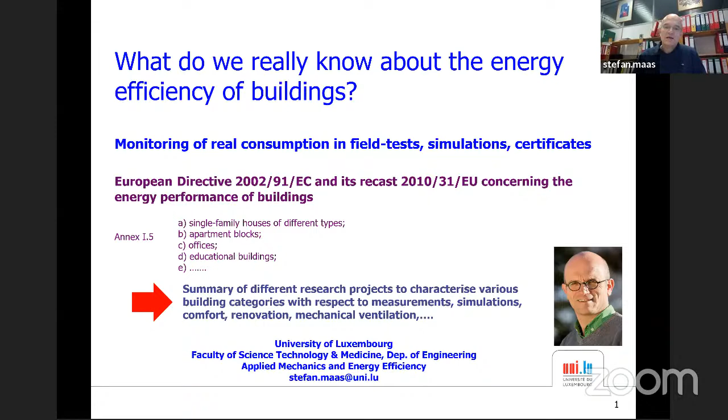As Dr. Giffen said, I'm a professor here at the University of Luxembourg. What I'm going to tell you is a summary of several PhD theses done in the past at our university. So I dare to say that we have today a reliable database to describe the situation in Luxembourg and in the greater region.

First, I'd like to start with some definitions to make sure we talk of the same thing. These directives go back to primary energy. Primary energy is non-renewable energy, for example crude oil, coal, uranium, or natural gas. Our certificates normally refer to this primary energy, which is then transformed into final energy, and the difference is you have losses during this transformation process.

So from primary to final energy you have losses. What you buy, what enters the building, is the final energy - that's what you pay. But the certificates refer to primary energy. Then we have again transformation losses inside the building, which in the end we call heating demand or net energy. That is again something different.

Now we'll look at two different characteristic cases, for instance the case of electricity. If you produce electricity, nearly two-thirds of this energy is lost as thermal energy somewhere in the production process. So for electricity, we apply in Luxembourg a factor of 2.7 to go back to the primary energy - this is the so-called primary energy factor. If we compare to fuel oil or gas, the factor is only 10%, because we typically have only 10% losses there.

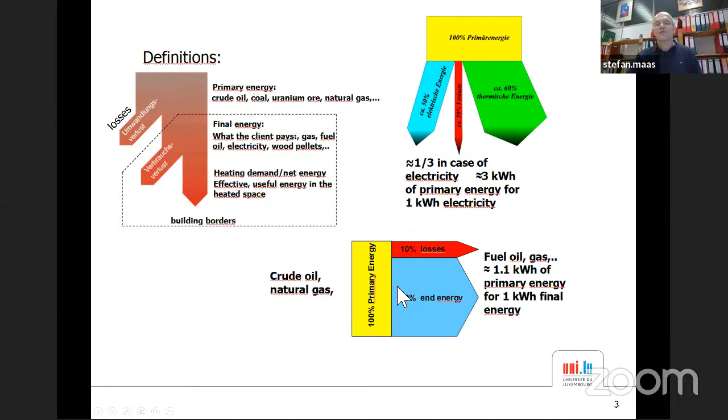Then the effect of climate - climate is different in Europe, it's not everywhere the same. If we look, for example, at the transmission losses of a wall, it is the U value, the transmittance, times the surface, times the temperature difference, times time. And this factor, temperature difference times time, is not constant over the year - it changes every day.

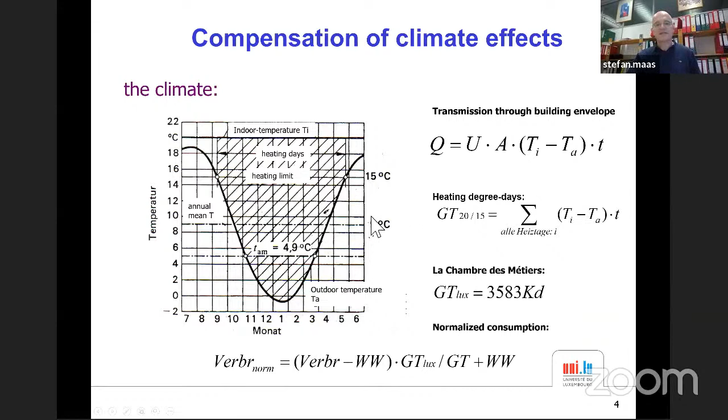The next point is the references we use. You can define many different surfaces in buildings. Here in our calculation, we referred to the so-called gross area, which is simply A times B, including all the walls, floors, staircase, everything. This surface is easy to calculate, but other European countries refer to the net area, which is different, so you have to convert. Here I refer to the gross area; if you want the net area, it's approximately 80%. Keep in mind, other norms refer to volumes. So you must pay attention to what your reference is, otherwise you compare apples with pears.

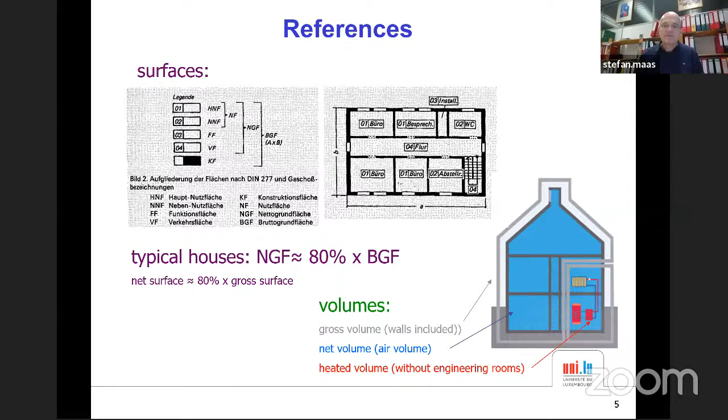Now let's look at the very first result: the final energy for heating and domestic hot water in the years 1997 to 2007. You see here a specific consumption in kilowatt hours per square meter and year, where the square meters are gross square meters. Just to give you an idea, 1 liter of fuel oil is approximately 10 kilowatt hours. This conversion is based on the lower heating value, meaning the water in the fumes is in vapor form. If the water is condensed, we call it the higher heating value. That's again an important point to pay attention to.

So what we see here is we analyzed 54 traditional houses in Luxembourg, and found a mean value of 131 kilowatt hours per square meter per year. That is 13 liters of fuel oil per square meter. And the standard deviation is 32, which is roughly one third of it.

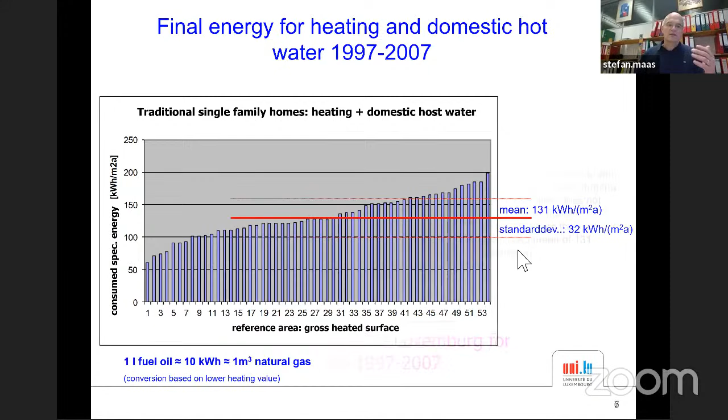Once we assume a normal distribution, we can say that with an N of 54 buildings analyzed, with a probability of 95%, the mean value does not deviate more than 10 from the calculated mean of 131. So our sample is representative for Luxembourg for these years, 1997 to 2007. That is the final conclusion.

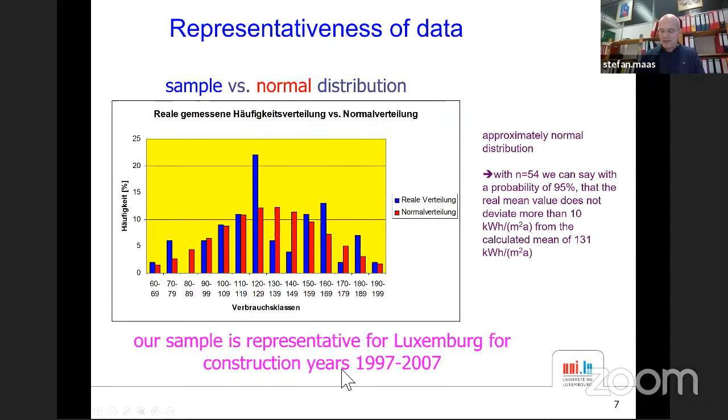Now, as Luxembourg is a very small country, we compare to other countries around us, other European countries. You have to find studies where you clearly have an indication of the climate, the heating degree days, so you have a clear reference. Here we used gross surface, others use net, but we can convert. Also we have to pay attention that we have a comparable year of construction. Here in Luxembourg, we used 1997 to 2007 in this study. And we found some of these studies.

We found data from Germany, Switzerland, and Austria. When we compare to the German data, Luxembourg is consuming 30% more, or Germany is one third better. The same in Switzerland. Austria is nearly the same as Luxembourg. So compared to Germany and Switzerland, Luxembourg has a deficit because our houses consume more.

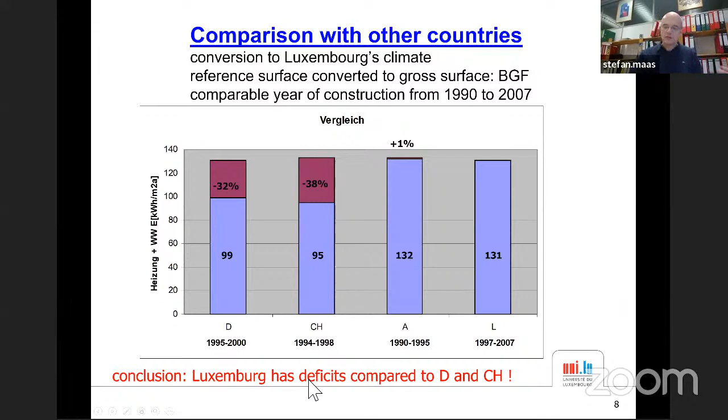But then we split the categories more in detail. We did not only analyze traditional homes, we also had row houses, prefabricated houses, and so-called low energy houses. Looking at the average value in these different categories, we see that for low energy houses we only have 73 kilowatt hours per square meter per year, which is 45% less than for traditional homes. So also in Luxembourg, we were able to build houses that consumed less energy in this period.

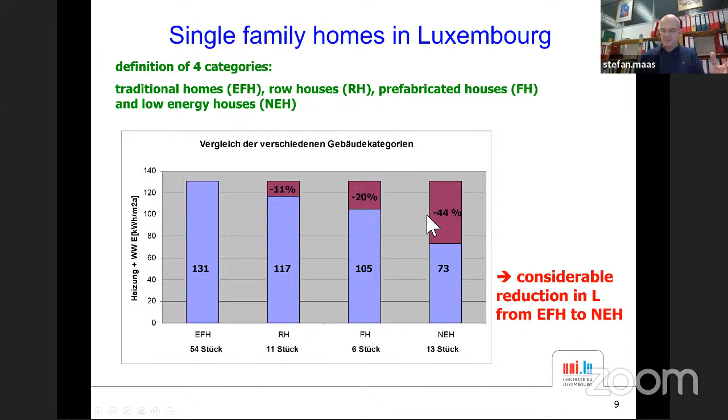Now let's look at what this low energy concept meant for these years, 1997 to 2007. Please pay attention, these definitions are permanently updated.

So a passive house of 2000 is no longer a passive house in 2020, and a low energy house today is not a low energy house at this time. At this time, it was a heating demand of 60 kilowatt hours per square meter, including a blower door test and a thermography test. That was a definition in Luxembourg in this time period.

And now if we take this 60 and multiply it by the transmission losses inside a house, which are typically 25%, plus add the domestic hot water, we end up with 100 kilowatt hours per square meter. This is for net surface, and if we convert to gross surface, we would have expected to find 80 kilowatt hours per square meter. So 80 would mean low energy concept according to definition, and we found 73.

The conclusion is Luxembourg's low energy concept worked well. We found in our field test what was expected.

And then we took data from the statistical office, called STATEC in Luxembourg. There we found that approximately 1,000 buildings are built here every year. But in this time, only 2% went for this low energy concept, and only 0.5% went for the so-called passive concept. That means the conclusion is, yes, the houses meet the requirements, but most of the people simply fulfill the requirements. They don't go for low energy or passive concept. They simply stick to the norm.

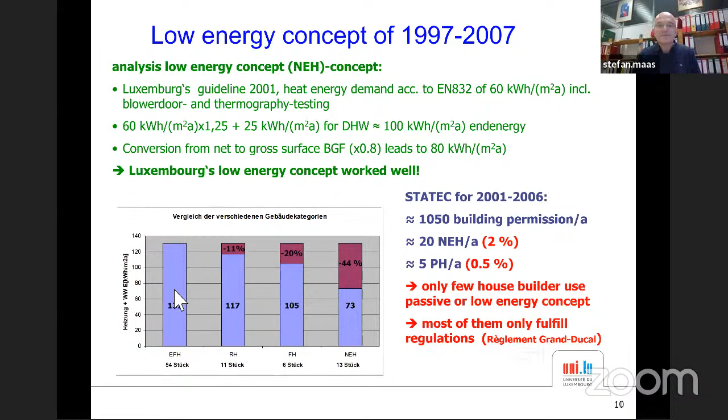Now we look at the electrical consumption of a family home, single family home. First of all, we look at the absolute values, so what every household is consuming.

In Luxembourg, we found an average of 6,000. Here you see the standard deviation. For the prefabricated homes, we found 5,400. For the row houses, 4,900. For the low energy houses, 4,800. So that means also in Luxembourg, we have considerable differences, and this low energy concept works quite well.

In Germany, we find 4,100, and 5,400 in Denmark. You see, Luxembourg is above Germany once again. And here are the so-called passive houses, which consume by far more - 14,000 kilowatt hours per year. That's interesting. Why do these passive houses consume so much electricity?

Now you see the electric consumption per square meter, referring once again to the gross surface. Then the picture is a bit moderated. We see the traditional homes with 24, the prefabricated 29, the row houses 28, but again, the low energy was 19. So the low energy is better than the normal one, and the passive is again above.

But now in Luxembourg, we are better than Germany. If we compare to the previous slide, here 6,000 versus 4,100. But if we look to the specific consumption, we have less. Why? Because the houses in Luxembourg are typically larger than the houses of our neighbors. So you have one stove, one fridge, and the larger the building is, the better the specific electric consumption. Once again, we have to be very careful what we compare to each other.

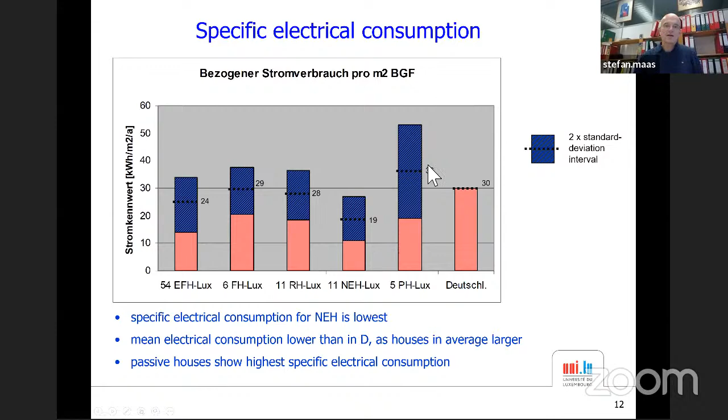But still, the passive houses consume quite a lot of electricity, more than the traditional homes. And here comes the explanation.

So if we go back to this primary energy, what we defined at the beginning, we have to multiply for gas and fuel oil with 1.1, and electricity in Luxembourg by 2.7. These factors are average factors for the transmission losses. They are defined by national governments, and it is not the same all over Europe. Therefore, you have to pay attention which factors are used.

Here you see the blue part, that is the heat part, and the red part is the electric part. If we look now to the normal houses - traditional, prefabricated, and series - we are around 200 kilowatt hours per square meter per year. The low energy houses are considerably lower, one third lower. The low energy is here, and the passive is 50%. So the conclusion is, yes, also in Luxembourg, we were able to build houses with only 50% of the normal consumption if we apply this passive house concept.

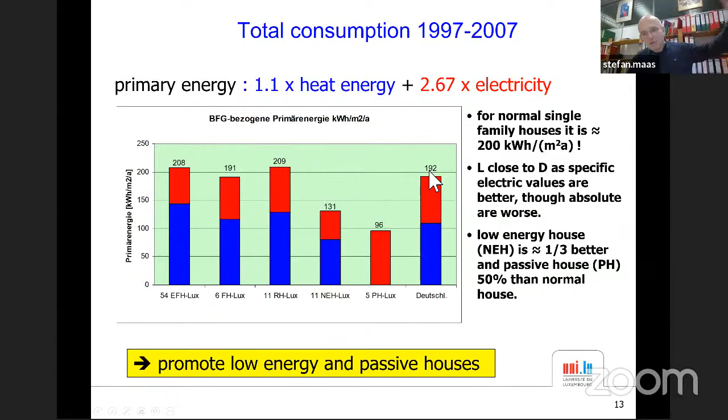But in this case, we use only electricity because you can substitute heat by electricity. That's the reason why the European norms refer to this primary energy. So the conclusion was, yes, please let's promote low energy and passive house concept because we have a clear reduction. Compared to Germany, for example, we are not far away - we have more or less the same specific values. So the absolute values are higher because our houses are bigger.

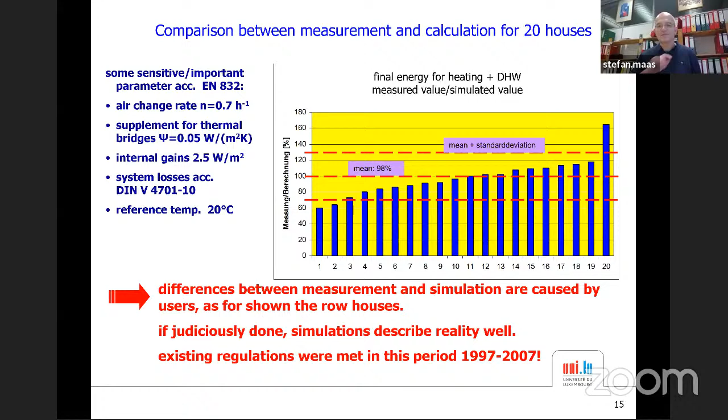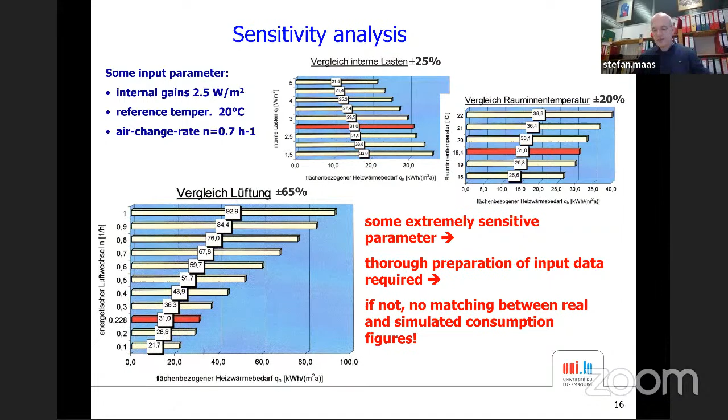So what I want to say is these calculations are extremely sensitive. There are some parameters which have a large impact on the result, so you really have to carefully prepare the input data and check that they really match with what the user does. Otherwise you will see differences between calculation and measurement.

So let's go back again here - that was the single family homes. I want to recall, on average we have 130 kilowatt hours per square meter in Luxembourg, and the standard deviation is 1/3.

Now we'll come to the next building category, which is schools and offices. We analyzed schools and offices which were built between 1995 and 2010, so let's say new schools and offices. I dare to say, compared to what was built in total, that our study is representative as well for the schools as for the offices. We again referred to the gross surface, normalized by the heating degree days and also by the cooling degree days, because many of these offices were actively cooled, meaning air conditioned.

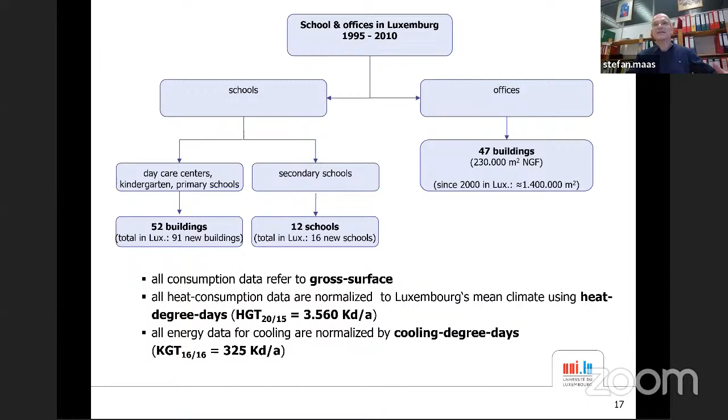Let's have a look first to the schools. We analyzed 64 schools, and here the different colors represent the different fuels used: gas, mazout, fuel oil, local heat network, wood, cogeneration. So different color simply means different energy vector. In average, we find 93, with a standard deviation of 50%.

Just to recall, single family homes were 131 with a standard deviation of only one third, while here it's 93 but the scatter is larger, meaning the buildings deviate more from each other. It depends on the way the building is built and exploited.

If we look to electricity consumption, single family homes were around 25 to 30. Here we find nearly the same average, 30 kilowatt hours per square meter per year, with a standard deviation again a bit larger than for single family homes, nearly 50%.

We found that canteens in these schools have a large impact on electricity consumption. Typically, a canteen adds 10 kilowatt hours per square meter of the total gross surface to the electric consumption, though these canteens are not very energy efficient.

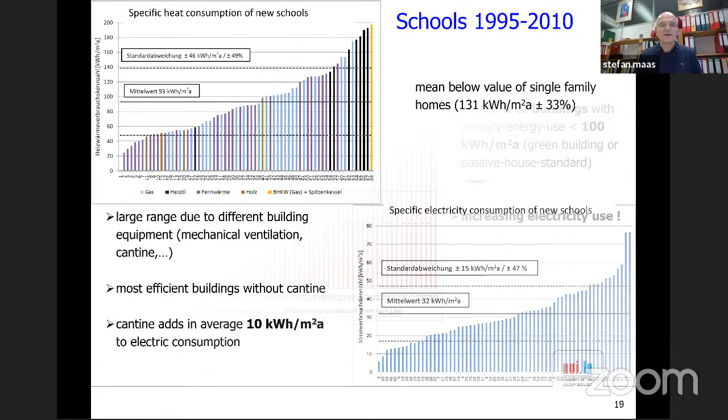Here we see the weighted sum, giving us the primary energy: heat times 1.1 and electricity times 2.7, the official weighting factors at this time. We find an average of 190 with a standard deviation again of one third. So for primary energy, the schools end up close to the single family homes, around 190 to 200, with the same one third standard deviation.

The best buildings are around 100, which is called green standard, passive house standard, or low energy standard. But the best buildings can be below 100 kilowatt hours per square meter per year.

Here I marked two different buildings, and you can easily understand why it makes sense to add electricity and heat. This building is dominated by heat, while this one, the blue part, is governed by electricity. So you can easily exchange heat by electricity. If you compare this building with this one, they have nearly the same sum, but very different parts of electricity and heat. So what I want to say is it makes sense to go back to primary energy, because you can exchange heat and electricity.

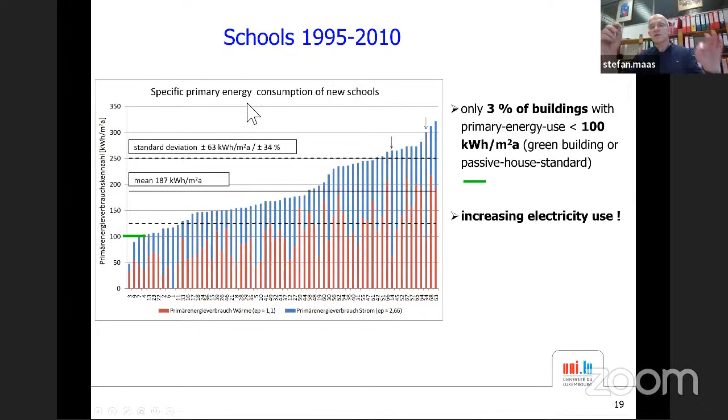Once again, we look at the schools by different building periods: before 2001, 2001 to 2004, 2005 to 2006, after 2007. We see a clear reduction in heat consumption in the newer schools, so when schools are newer, they consume less heat. In red are the standard buildings, in yellow the low energy, and in green the so-called passive buildings at the time. It's clear that with age we see a reduction of heat consumption.

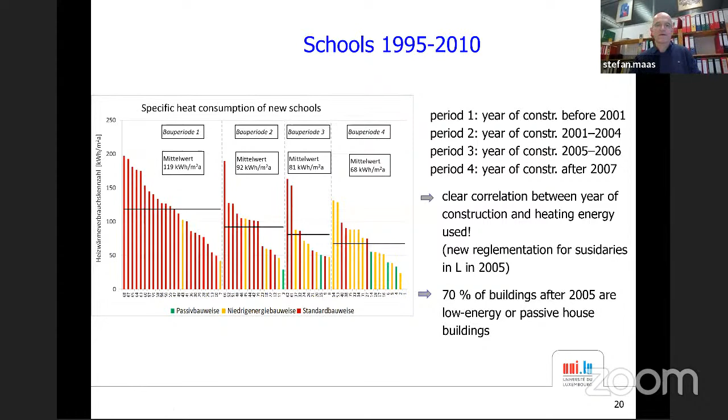But when we go back to primary energy, the weighted sum of heat and electricity, we see a large scatter. The standard ones are red dots, low energy are yellow dots, and passive buildings are green dots. You see passive houses which consume by far more than other standard buildings, and the same is true for low energy buildings. But still, if we go for the averages, we see a difference.

The mean values for standard are 113, for low energy 72, and for passive 35 for heat. For electricity it's 30, 35, 35. The weighted sum uses 1.1 for heat and 2.66 for electricity to get primary energy. Primary energy for normal standard schools is 200, for low energy 170, and for passive 130. So we have a potential reduction of one third if everything were passive, and if everything were low energy, a reduction of 16% on average.

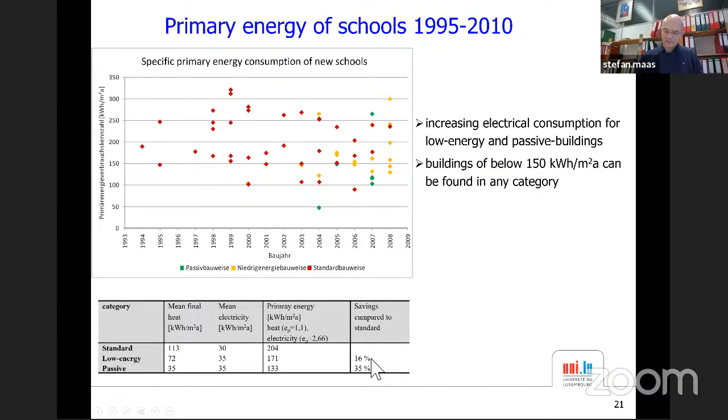Here we compare again to our neighbors. I don't want to go into detail, but this is the heat consumption. Here, the flag of Luxembourg marks the Luxembourgish values, and these are values of older schools from our neighbors in other European studies. For heat consumption shown in this picture, Luxembourg is always below the neighbors, so our new schools are better with heat consumption than our neighbors.

If we switch to electricity, we see exactly the opposite. Our new schools in Luxembourg consume by far more electricity than our neighboring countries and their older schools. Why that? Well, new schools use more canteens, more computers, more ventilation and cooling, and air conditioning, and all this increases the electricity consumption.

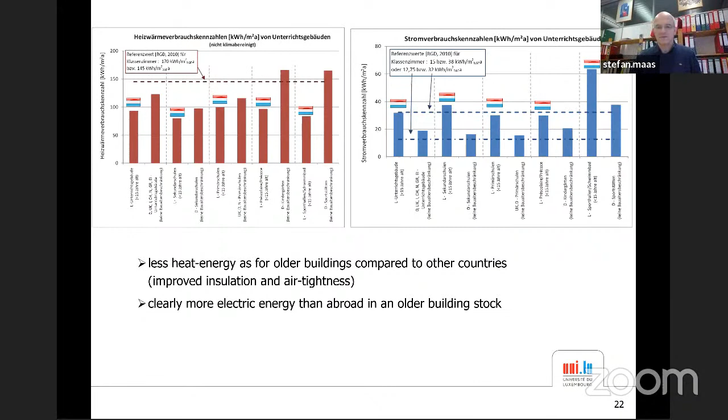So it's very clear, in future if we want to reduce, we have to have a close look on the electricity consumption. Here is the weighted sum, the primary energy, for these buildings, again compared to the neighbor. You see that the new schools in Luxembourg normally consume even more than the older buildings in the neighboring countries. So please pay attention to this electricity use, because the tendency is very clear. We replace heat by using electricity for higher comfort, and that's a problem because the total energy efficiency does not really decrease with age.

The next category is offices. So schools are more or less close to single-family homes. Now for office buildings from 1995 to 2010, we find an average value for the heat of 130. The schools were 93, the single-family homes were also 130, so not far away. But we see a larger scatter: the scatter was 30% for schools, here we have nearly 50% standard deviation.

Again, the different colors represent the different fuels used: local heat network, cogeneration, gas, fuel oil. We also see higher values for electricity. Remember, electricity for schools and single-family homes was roughly 30 kilowatt hours. For offices, we see 170 kilowatt hours. That means more than 5 times more than residential buildings, which is a big problem, caused by computers, cooling, and climatization.

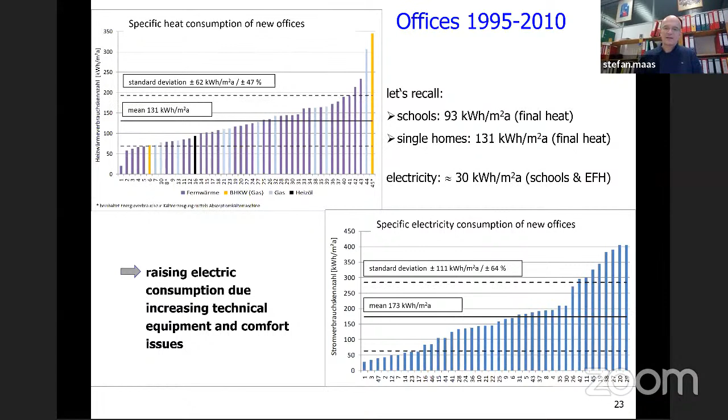I will explain that now. Here you see the specific electricity consumption of new offices. This part is fully air-conditioned, which is nearly all, 90%, and only a small part, nearly 10%, were not air-conditioned. For the non-air-conditioned, we find a mean value of 70. For the fully air-conditioned, 215. So we see a factor of 3 when we go for air conditioning.

And in red, you see the offices with large data centers, computer server rooms, which consume a lot. Here you see the primary energy, the weighted sum of heat and electricity. The green building standard is 100, so the target is 100. You see the heat part, the red part, is quite low. So for these office buildings, what is really dominating is the blue and green part.

Green is primary energy used for cooling. Some of these buildings have special counters that let you separate this, others not, so we don't always have a green column. But what is clear for these office buildings is the absolute dominating part is electricity. We have mean values of 700 kilowatt hours per square meter, that is 7 times more than it should be. Again, schools and traditional single-family homes were 200, but here we are at 700.

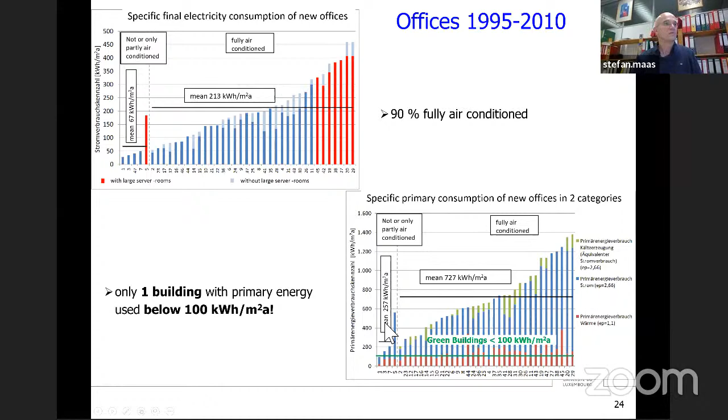If we compare to those administrative buildings which are not actively air conditioned, they are far below. So this air conditioning seems to be a problem for energetic consumption. Now we compare the financial sector with normal administration. In the financial sector for heat, we find an average of 150, whereas in normal administration 100. So 50% more in the financial sector.

It's even worse if we look at electricity consumption. In normal administration we have 80, in the financial sector 210, that means a factor of 3. So the financial sector, the banks here in Luxembourg, have high requirements for comfort. They have large data centers, and large glazed envelopes to give transparency, or at least the picture of transparency. Therefore, many of these banks have glass on their facades, and this all leads to high consumption.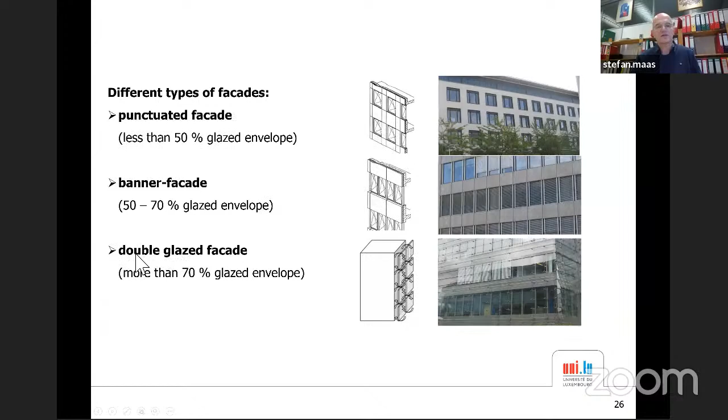Here we compared different facade types. When we have less than 50% glass, we call it punctuated. If we are between 50 and 70%, we call it banner facade. And if above 70%, we call it double glazed facade. Looking at heat consumption for punctuated, banner, and double glazed facades, we see a clear increase of heat consumption the more glass we put on the facade, but even more pronounced is the rise in specific electric consumption.

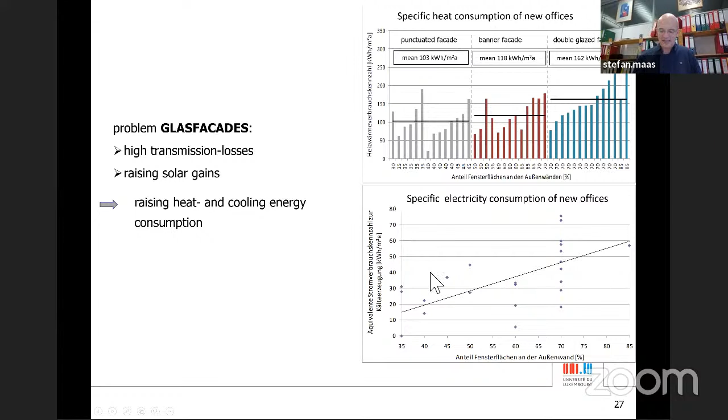The higher the share of windows on the surface, the higher the electricity consumption on average. So to summarize what has to be done to get an energy efficient school or office building: we should not do active cooling, but instead go for passive cooling by night ventilation.

Here's an example from a new school in Luxembourg, where a third of the window is split into two parts. A smaller part is barred, and that window can be left open overnight. Nobody comes in, but we still get a high air exchange rate overnight. It's very simple, but it works quite well. This is what we call night ventilation by opening of the windows.

Next, we should limit the window size. We should not have more than 45% of the building envelope covered with windows. Here's a bad example where we have roughly 100% of windows on the facade.

We should select a low G value but a high tau value. The tau value is the percent of light which passes through the glazing, but only the visible part, between 400 and 800 nanometers. The G value covers the complete spectrum of light, including infrared and ultraviolet. Today you can buy glass with a factor of 2, meaning tau is twice as high as G. This is called solar glass, a little more expensive but not dramatically so, and it helps a lot, especially in administrative buildings.

We should go for daylight sensors. Here we compared two lighting systems, an old one and a new one, switching between them every week over a year in an office room. The old system switched on at 8 in the morning and ran at full power all day, whereas the new sensor system dimmed according to the sun, automatically reducing power when daylight was available. You can buy that today. It's a bit more expensive but not tremendously so, and you can save a lot of energy, especially in office buildings, with daylight sensors and presence detectors for the lighting.

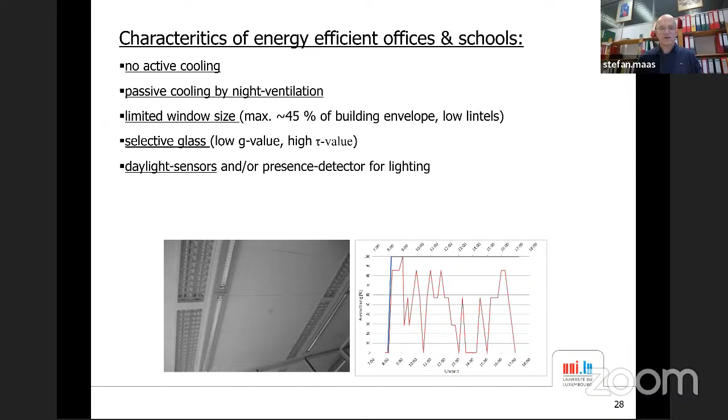We should also use external sun blinds on the outside. There are new systems that try to reflect light to the back of the room, which helps achieve a high daylight coefficient away from the window. But the sun blind must be outside, not inside, because if it's inside, the heat is already in the room, and then you have to do active cooling.

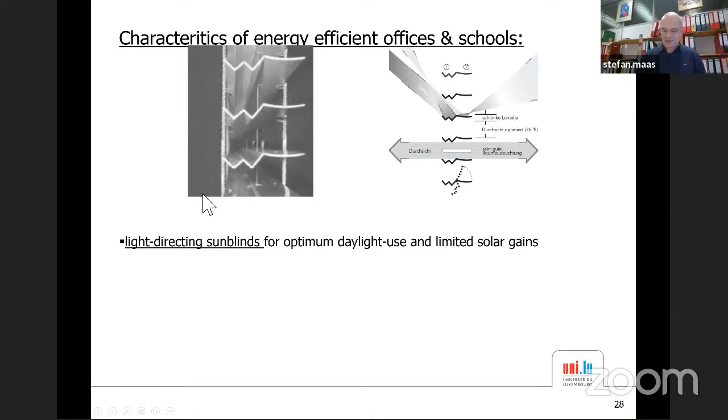We should also have high inertia in the buildings. Here you see an example where the concrete is directly accessible. This helps avoid overheating by giving high thermal inertia. Overheating typically takes place in the afternoon around 2 or 3 o'clock, when temperature rises, but with high inertia and thermal mass, the building heats up slowly, giving time overnight to release this heat again. So high thermal inertia is good for night ventilation and helps avoid active cooling.

Here is a comparison and summary of what we've seen so far for schools and offices, showing primary energy use. In red are the schools, averaging 190, and in blue are the offices. We see a very large scatter for the offices—the worst are above 1,000 kilowatt hours per square meter per year, which is not very good. These offices were all new buildings.

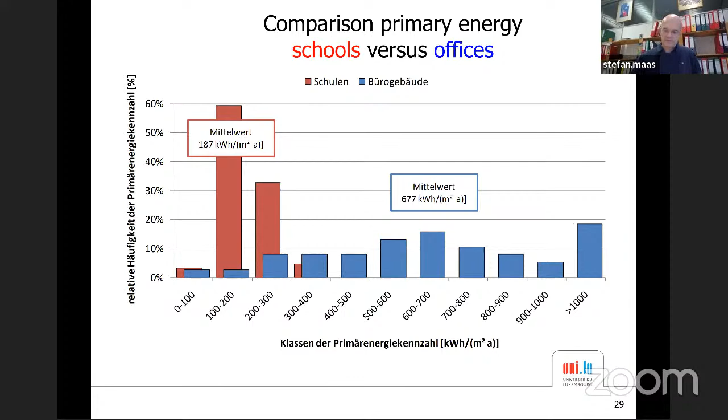Then we changed the ceiling to a suspended ceiling instead of a high-inertia concrete ceiling, and got 2 hours of overheating. If we use internal sun blinds instead of external sun blinds, we also get about 3 hours of overheating.

If we don't have dimming for the lights, we get 9 hours of overheating. If we increase the size of the windows up to 63% of the surface, we got 10 hours. If we used other glass, 0.5 instead of 0.35, we got 20 hours. And if we didn't have night ventilation, we got 35 hours.

But still 35 hours in 1 year is not tremendous, knowing that a year is roughly 9,000 hours. So that means you are in an ideal, well-designed building with passive cooling facilities, and you simply take out night ventilation. But when you start to accumulate these effects, you start with the optimum, then do the suspended ceiling plus the internal sun blind plus the dimming plus, and you end up with 5,000 hours of overheating. That means 2/3 of the year you have overheating in this building.

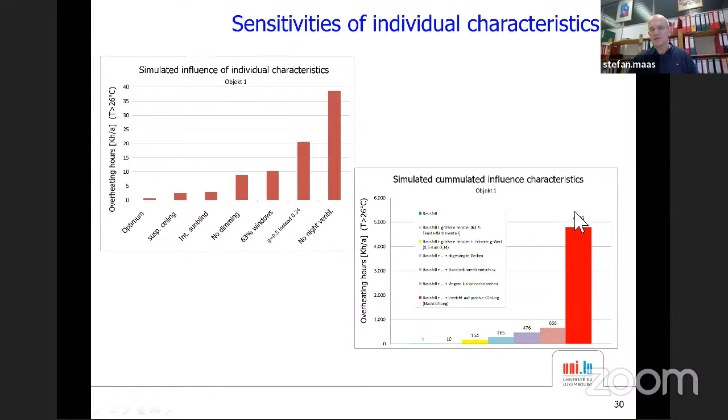But what I want to demonstrate is this is a very non-linear effect, as we also can see here. So we start very slow. If you have a good building, you can do 1 or 2 mistakes or whatever, you can change a little bit, the building is tolerant. But if you start to accumulate all these errors, you end up with a catastrophic value and have to go for active climatization and cooling. And this destroys your energy balance. That's what we can also simulate.

To summarize all this, I compared the primary energy of old and new buildings. For the single family homes, the old ones were around 300, the new ones 220 - a 25% reduction, and the best ones were here. For the apartments, the same picture, 25% reduction, the best ones were here. For the schools, 280, the new ones 25% less, the best ones were here.

But the offices are different. The old ones were at 280, the new ones at 260, the best ones were here, and the new fully air-conditioned are around 700, which is really not acceptable, but that's what we see in the field.

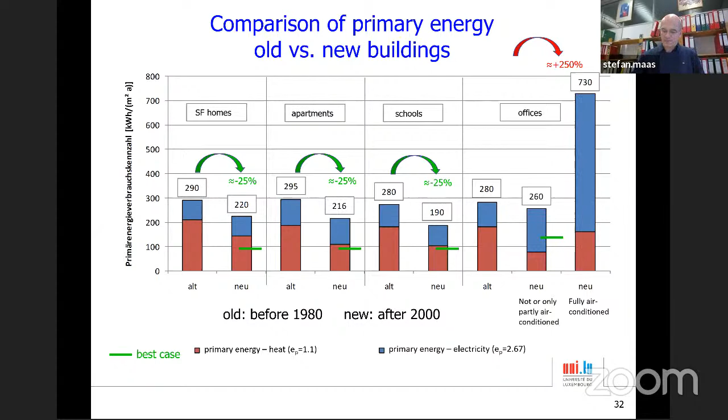So that is the study about schools and offices. The next chapter is about retrofit. I do not want to explain all details because we are running out of time, but we analyzed typical retrofit measures and tried to find out whether this makes sense from an economic point of view. We assessed typical things, exchange of windows for instance, insulation outside of the building, and asked the question: does this make sense? Can the user save money by investing in these things?

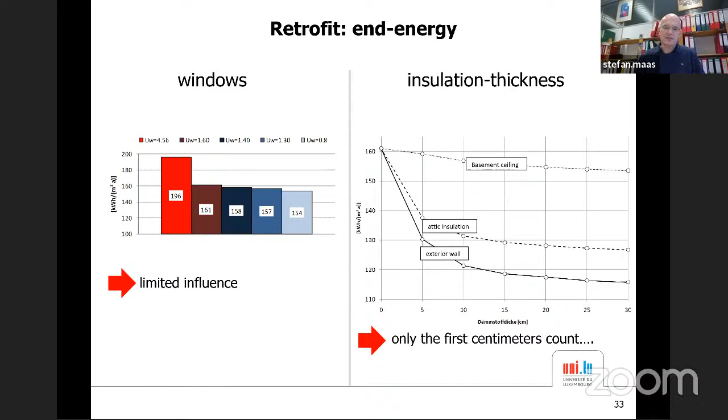Therefore, you need to predict the energy prices, and then we calculated the net present value, which is the money you save or the money you lose. And I simply want to go for the summary, which we will see here.

So what is highly economic is the insulation of the attic. If you have an attic which is not insulated, please insulate it. It's cheap and it helps a lot.

If you have a plaster outside a building which is damaged, then before repairing the plaster, please add a thermal insulation, a composite system. That also makes sense if the plaster is damaged. But if the plaster is still fine and you don't need to do anything, then from an economic point of view, it does not make sense.

If you have an old heating system, a low temperature heating, and you want to replace it by a condensing boiler only because you think you can save money, it is not really economic. It depends a little bit on the age, on the conditions. It can be refundable, it can be economic, but not as much as attic insulation.

What does not make sense is to exchange the windows. If the windows are still intact, if they work well, and you have double glazed windows, then from an economic point of view, it does not make sense to exchange them. Neither the insulation of the basement ceiling from below is economic - too expensive to be refundable. Heat pumps depend a little bit on the size. Sometimes it makes sense, sometimes it does not make sense to exchange an existing heating by a heat pump.

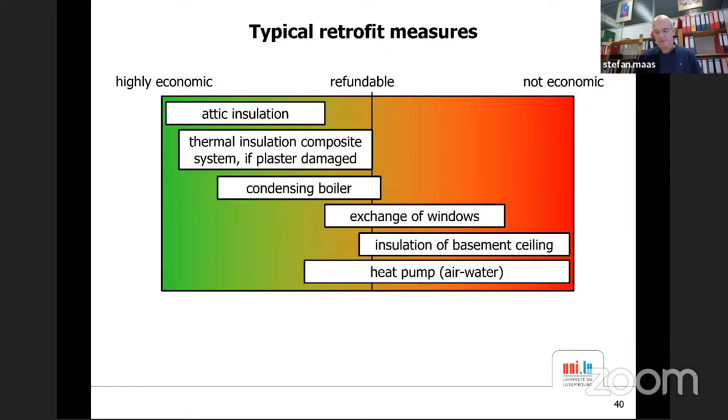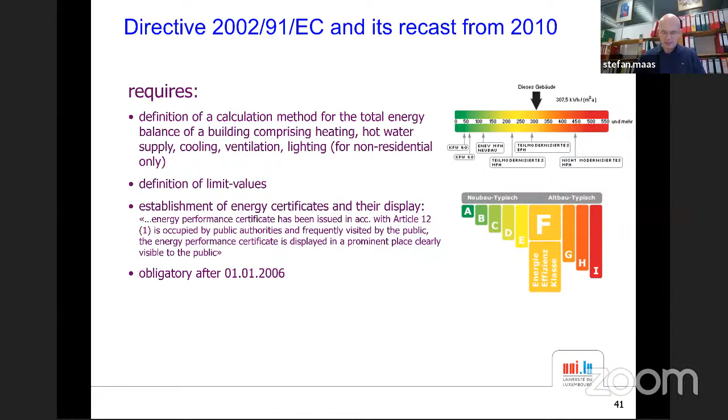Now this part is about energy certificates. I started already at the beginning with this directive from the EU - every building in Luxembourg and in Europe in total needs such an energy certificate. It was launched in 2002, recast in 2010, and now in Europe we have these energy certificates everywhere, which are not really comparable.

We did a study and looked at these energy certificates. Some of these certificates are based on calculation - you calculate the energy consumption and then give the certificate. That's the blue columns, and the red columns are the measured values of energy consumption. For old buildings, built before '69, we see a large deviation between what was measured and what was calculated according to the official guidelines of the energy certificates - 100% deviation.

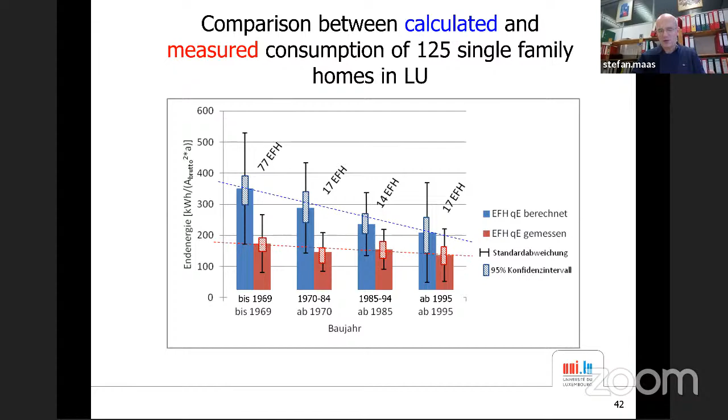When the buildings are newer, the difference decreases. For single family homes, 125 in total which we analyzed, the calculation does not match the real consumption. The same is true for apartments - we analyzed 870 apartments, and for the old ones we found a large discrepancy, a large overestimation by the energy certificates compared to real consumption. For the new ones, we have convergence.

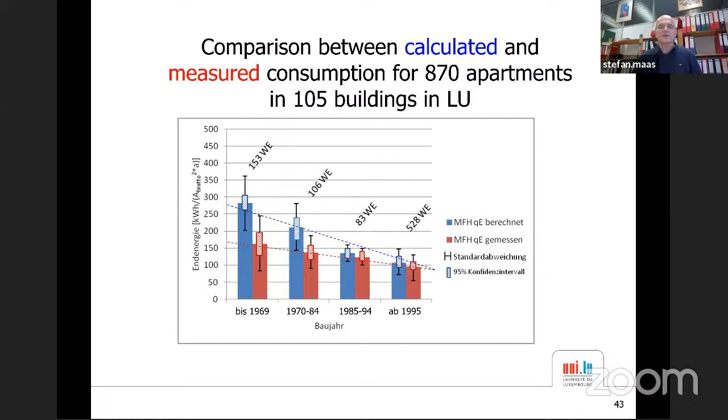We also tried to find out why we have this discrepancy. There are individual things which are sensitive and not correctly reflected in the calculation of the energy certificates. So in the end, the idea of these certificates is good, but there still need to be improvements so they really reflect the situation on site.

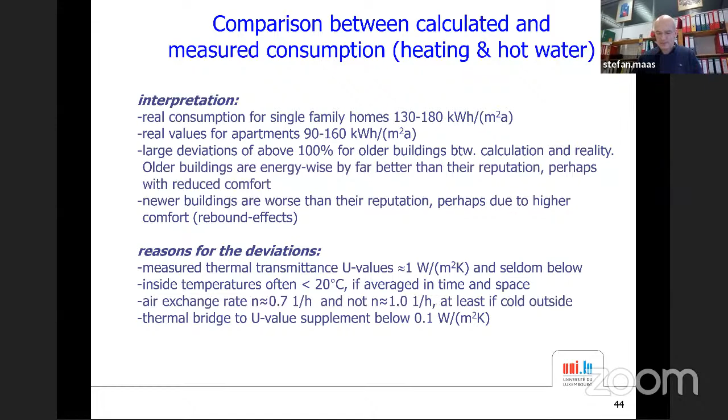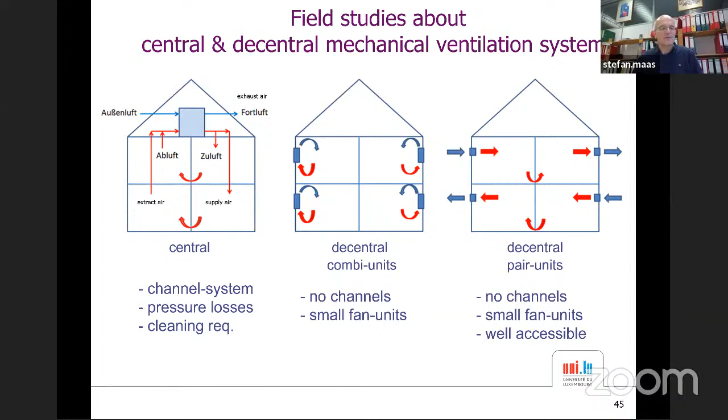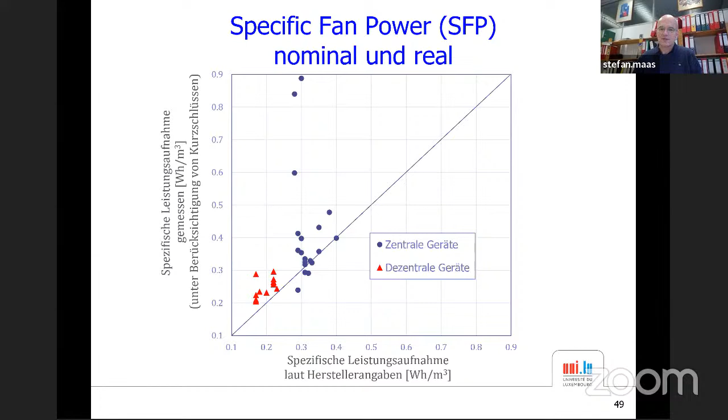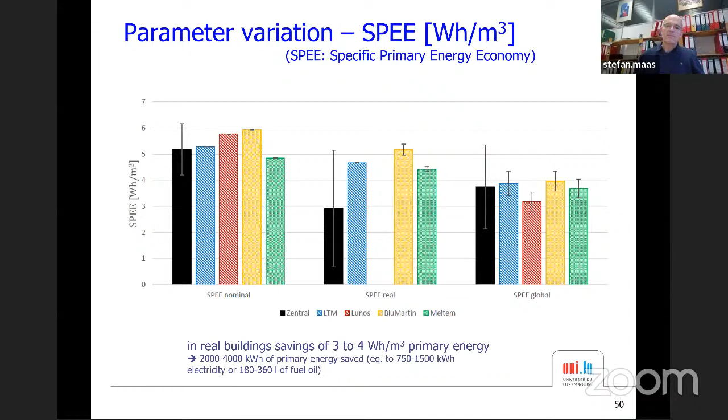The last part I want to roughly look at is a field study about mechanical ventilation systems. There are different systems, and we analyzed the real efficiency versus the nominal efficiency, and we saw large discrepancies. With a ventilation system you cannot really save energy - you can save a little bit, you can improve comfort in a room, but you don't really save energy. And when it comes to investment, it costs money, and filter and maintenance is more important than electricity cost.

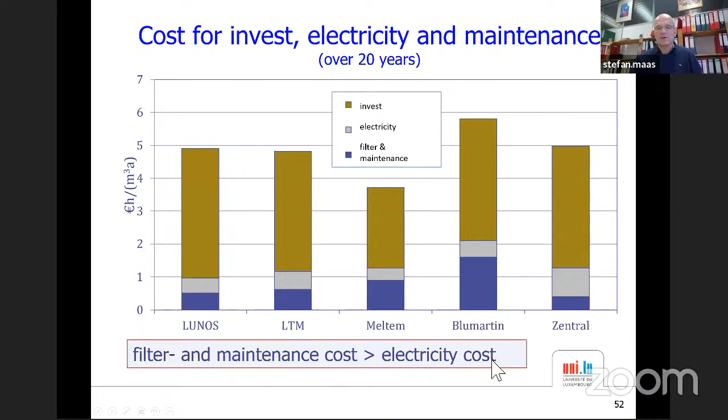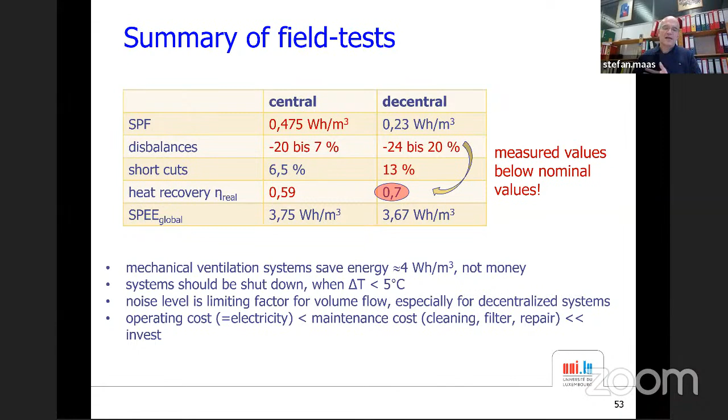The summary of the field test is that we have imbalances between the blown air and the extracted air, the real efficiency is below the nominal efficiency, and you can save a little bit of energy with these ventilation devices, but not much.

If you look at primary energy and compare the different systems, if you go for a system running in a control loop - one that automatically looks at, for instance, CO2 concentration and ventilates only if people are present - that makes sense. You can save roughly 50% of the energy with a sensor-driven control loop system.

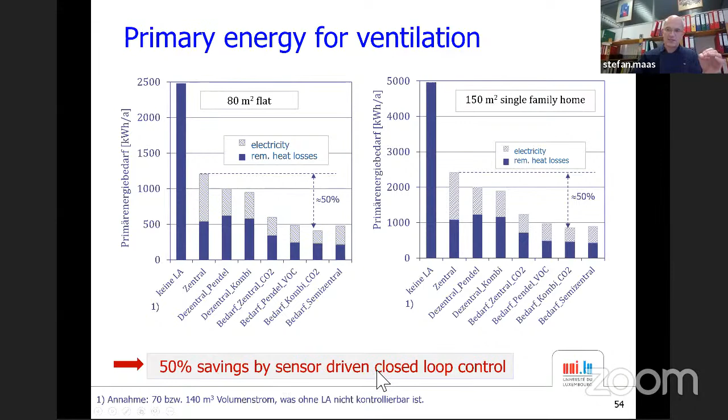From the cost side though, it does not make sense - a system without ventilation is cheaper than all the other systems. But if you compare the systems running in a control loop, controlled by sensors so they only ventilate when really needed, you can also save 25% of money.

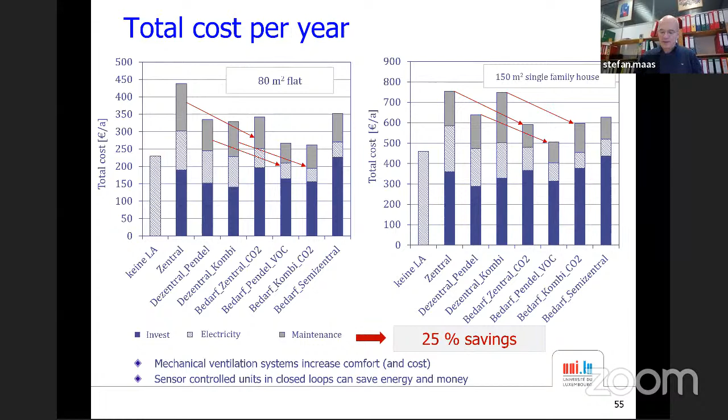So let's go to the summary to stay on time. We tried to build up a reliable representative database for Luxembourg, and I dare say for neighboring countries too, covering single family homes, apartments, schools and offices. We tried to figure out the key parameters for energy efficient buildings and satisfied users, and economic and ecologic optima for retrofit measures, and also to check what is negative and should be avoided.

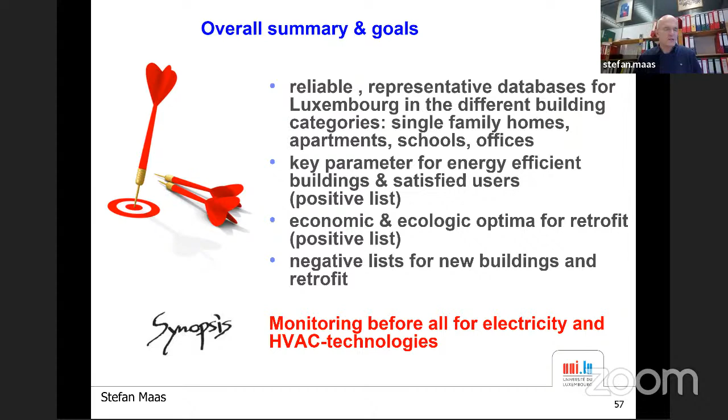The overall conclusion is: pay attention to electricity and to these HVAC technologies. First, do a good passive design - passive meaning without electricity use, a good concept, good insulation - and what helps you in summer also helps you in winter. Then you find good energy values. I thank you for your attention, and I would be happy to discuss with you.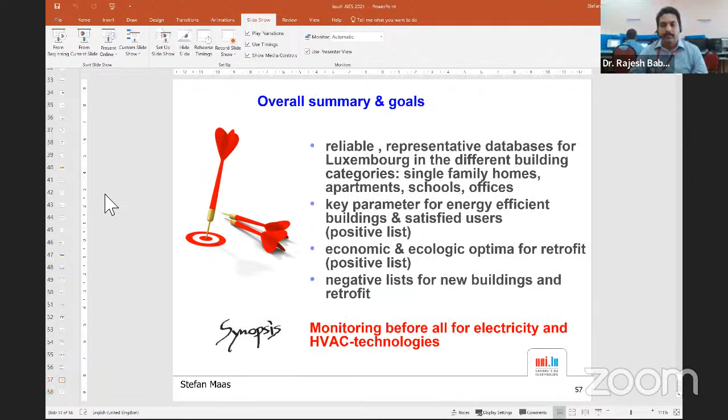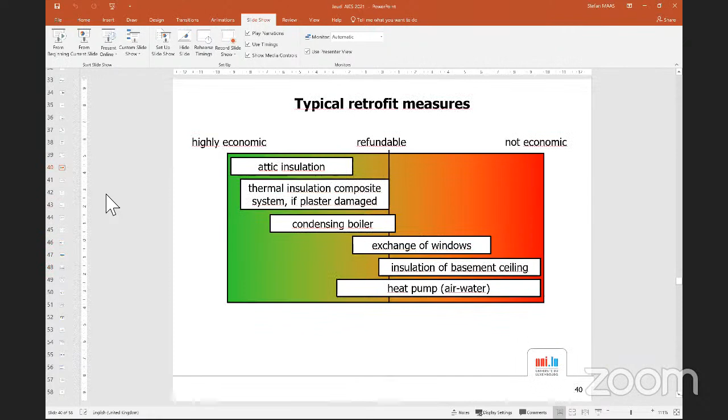Which slide? Number 8. Yes, sir. He is asking, if this type of analysis were applied in India, because you presented the case for Luxembourg, and suppose we want to incorporate this idea in our country, in India, what are the key parameters we have to focus on while implementing this type of analysis here?

I cannot give you a scientific answer because I did not investigate for the climate of India. Therefore I'm a bit careful. I don't know what is the heating load and the cooling load of your Indian climate. And I guess it also differs whether you are in the south or in the north, because you are living in a very large country.

But we are actually doing a similar study for African climate. So we have many students here from Africa, and we try to find out what makes sense for an African climate. I dare to say that good insulation and good passive design is always positive wherever you are, because what is good for cold climate is also good for hot climate. So good insulation, in my opinion, makes sense. But the part about glazed windows and these things has to be specifically analyzed depending on your climate.

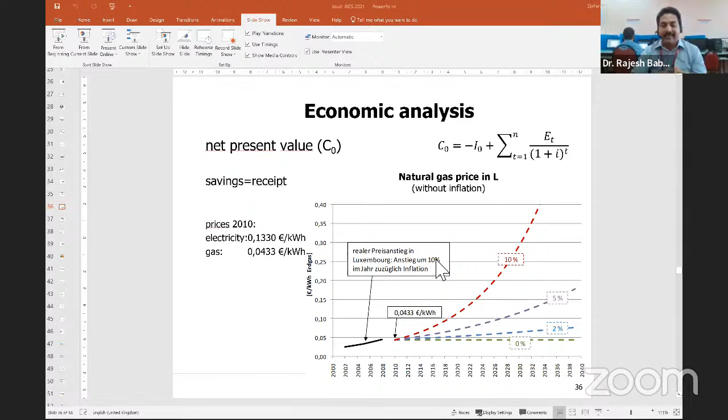I take this as my proud privilege and honor to propose a vote of thanks to Professor Stefan Maas. He very clearly presented the need for thermally efficient buildings, citing the example of Luxembourg, and some delegates pointed out how we can incorporate this type of analysis in Indian conditions. More study is required in that direction, but he has given insights on the need for sensitivity analysis and how to implement it. Implementation is left to the policymakers; from the academic point of view, we can give recommendations, and implementation is left with them. Thank you very much, Professor Stefan Maas, for your valuable time and for sharing your knowledge with us.